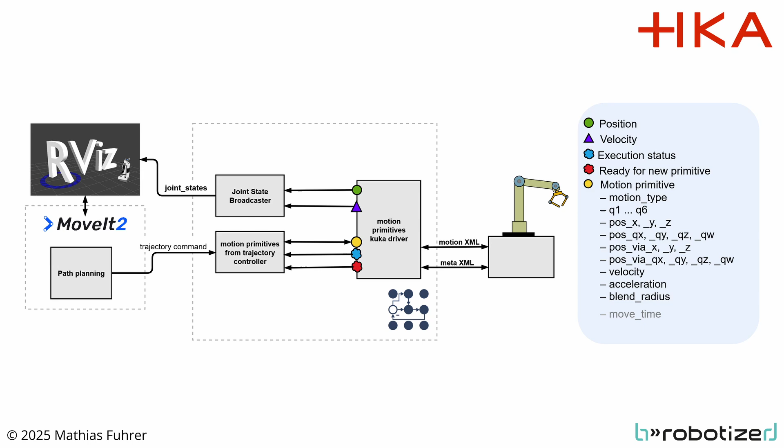Sending motion primitives instead of a trajectory makes the real-time requirements on the ROS2 side less critical. It also has the advantage that the robot controller has a better understanding of the robot's dynamics. The controller receives the trajectory computed by MoveIt and approximates it using motion primitives. There are currently two options: an approximation in joint space using linear joint primitives, also known as PTP or MoveJ, or an approximation in Cartesian space using linear Cartesian primitives, also referred to as Lin or MoveL.

Both approaches use the Ramer-Douglas-Peucker algorithm. This shows how a trajectory planned as a Lin motion with the Pilz planner is reduced to a single Lin primitive.

Here the planned path is shown in blue and the approximated path in orange. The coordinate frames represent the target poses of the Lin primitives. The entire motion is thus approximated by a single Lin primitive.

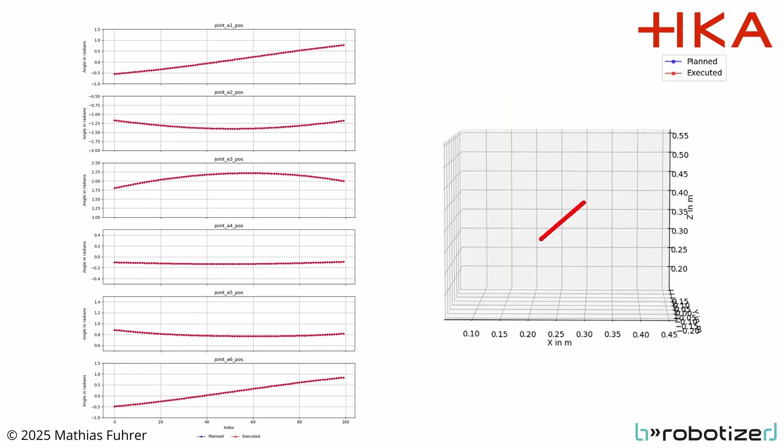On the left the joint trajectories are shown, and on the right the position of the end effector for both the planned and executed motion. The planned motion is shown in blue, while the executed motion is shown in red. Both plots indicate only a minor deviation.

By increasing the velocity and acceleration scaling, the movement can also be performed more quickly.

Here the same is shown for a PTP trajectory generated by the Pilz planner, which was approximated in joint space using a single PTP primitive.

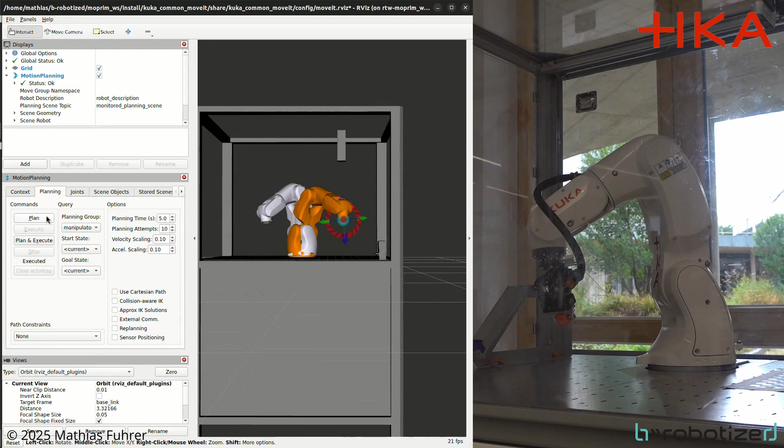And again, by increasing the velocity and acceleration scaling, the movement can be performed more quickly.

This is where it gets interesting. Using the OMPL planner, a collision-free path around the obstacle was planned and then approximated using PTP primitives. Note that the gripper is not considered here.